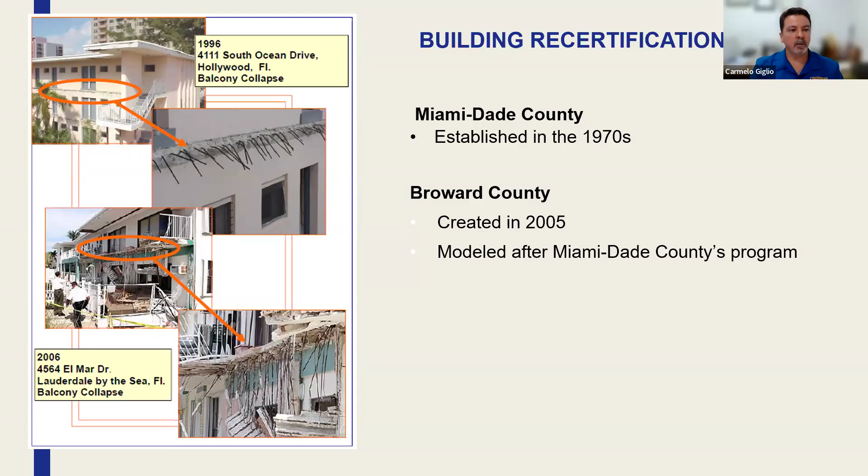So recertifications, when do they start? We had building failures, as we know too well now. But interestingly, Miami-Dade started their program back in the 1970s, the 40-year recert program, way back. It's been around for a long time. Then in 2005, Broward County started theirs. This photo is a clip from the Broward County program that's still out there. You can see the balcony collapsed, which is kind of when Broward County initiated their program.

I'm going to talk more about this. For the most part, we're going to discuss substantial structural deterioration. Just know that for the most part, when engineers go into buildings, they don't see this substantial structural deterioration, it's also a nebulous definition, but we don't see a lot of it. What we see is a lot of maintenance needed that doesn't rise to the level of substantial structural deterioration, but repairs are needed. Rarely does a phase 1 inspection pass outright. I think what's happening is a lot of engineers are passing these inspections despite repairs being needed, and I'll talk more about that in a bit.

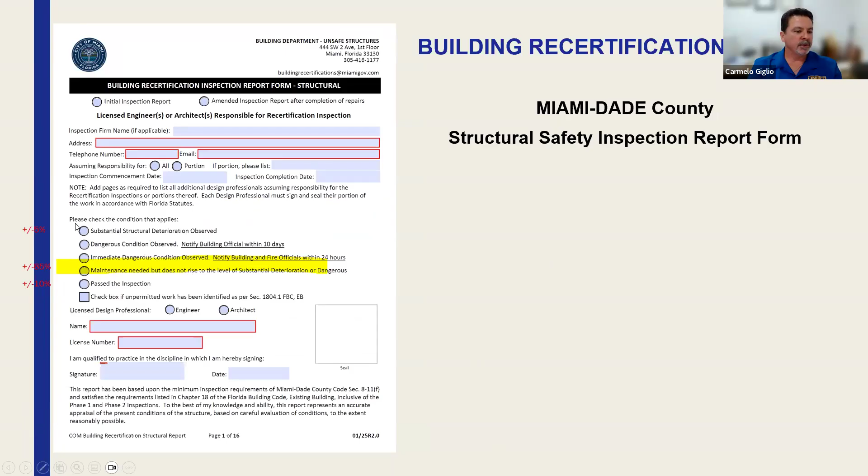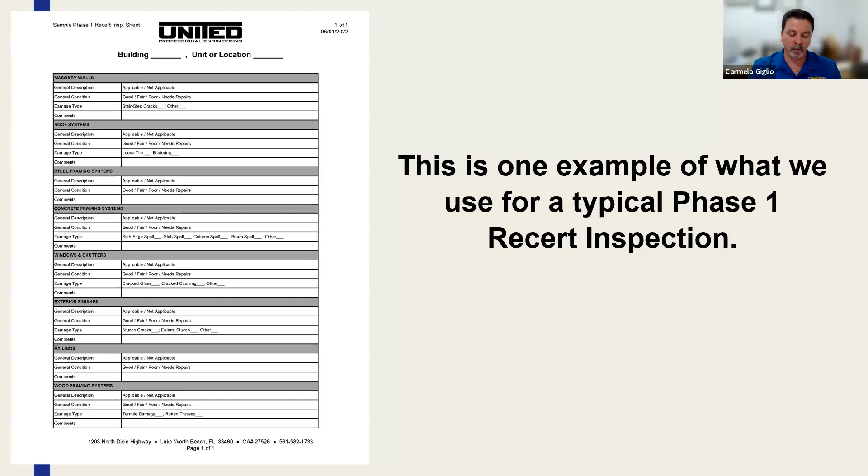This phase one is a cursory look at the building, not a full condition assessment. Engineers are looking at a sample, maybe 10, 20, or 30% of the balconies, perimeter areas, and common areas. They're also looking at typical, general areas only, not doing soundings or any testing. It's a visual assessment only, just a watered-down structural condition assessment.

Champlain Towers South occurred, as you know, interestingly enough, today's the 5-year anniversary. I was involved with the Surfside Working Group after the collapse. The Florida Engineering Society and the ACEC created the Surfside Working Group, and the purpose was to get together and come up with recommendations that the state could use statewide to make change for the better, to improve building safety in Florida.

So when we did the group, our intent was to not reinvent the wheel, but use what Miami-Dade County and Broward County were already doing, and extrapolate it out, maybe adding some things to make it more detailed.

One of the things brought up during the Surfside Working Group was the cycling. It was recommended that for coastal properties, the first milestone inspection be done at 20 years, then 7-year cycles, within 3 miles of the coast. Outside that 3 miles, you'd do a 30-year milestone and 10 years thereafter. That was in the paper, if you look it up.

The phasing was also a big one. The timing and cycling is very critical, but the phasing is critical too. There was never intended to be this language, 'substantial structural deterioration.' It was always supposed to be phase one, essentially a 40-year inspection - a milestone inspection - and then if you failed the phase one due to needed repairs, you'd go to phase two, a second part where you do a more thorough condition assessment.

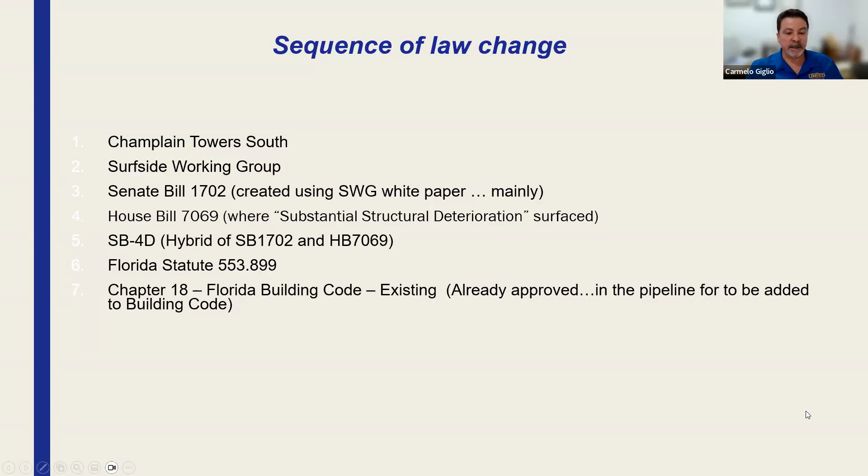Then the House came in and did their own bill, 7069, and that's where 'substantial structural deterioration' surfaced. In order for the House to accept the Senate's bill, a hybrid bill was created called SB 4D, and that's what was set to law. Florida Statute 553.899 was created from that, and then we got Chapter 18 - this statute went into the Florida Building Code, Chapter 18, which I need to check. As of a month ago it still wasn't in there, but it is in process.

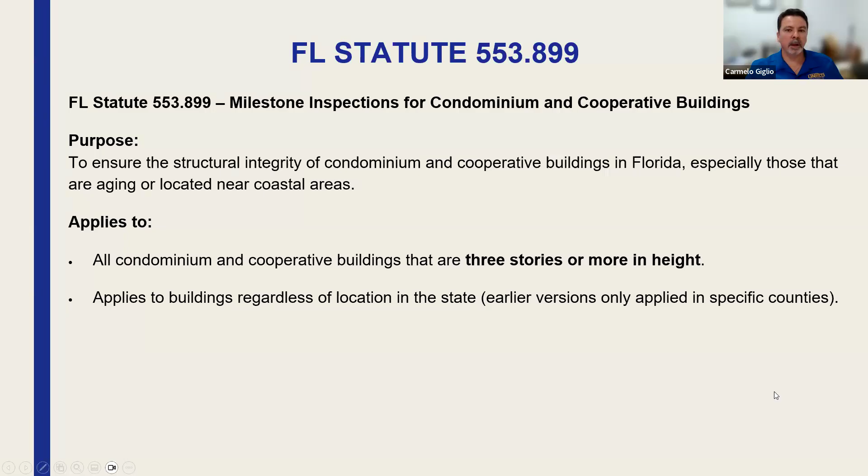This is kind of lengthy, as you know, but I'm not going to get too heavily into it - it can be read verbatim online. But it's mainly for multi-story condo buildings - that was the intent of 553899.

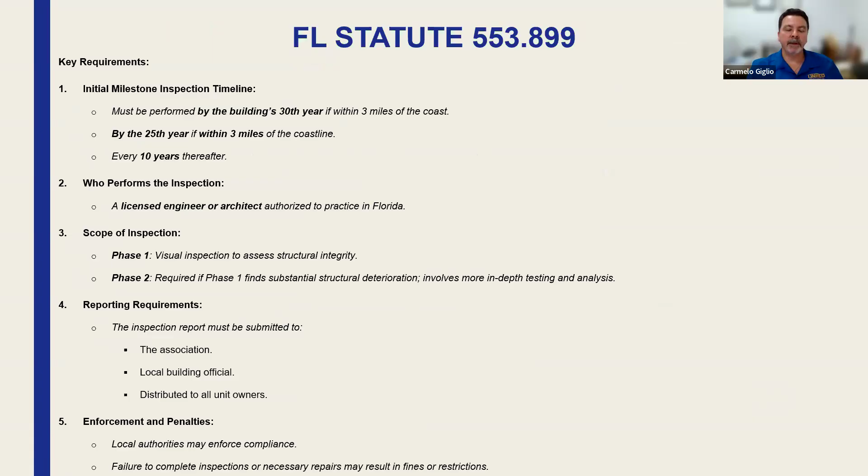We're going to talk a little bit about some of the counties - that statute's a minimum. Some counties have opted to have these inspections done on other types of buildings, including commercial buildings, which I'll talk about in a few minutes.

As an example of the cycling we talked about, Florida statute has 25 years for coastal properties and 30 years for inland, with cycles of 10 years after that - pretty much across the board. One interesting thing is Highland Beach kept a 25-year cycle and then 7 years thereafter, going with the tighter cycle recommended in the Surfside Working Group document. But the cycles are generally all the same.

In my opinion, in the end, I think we got a pretty good deal. We wanted 20 years and then 7 years thereafter; we got 25 and 10 years thereafter. The intent was redundancy in inspections, so that instead of one inspection at 40 years - before which we've had multiple collapses -

the intent is to do multiple inspections and repair cycles before reaching that 40-year-old threshold. That's for redundancy, to make sure you have multiple engineers, multiple owners, multiple contractors going through the building - more eyes, and a better possibility that a disaster can be mitigated. That was the intent behind the 20-year cycle, so you'd have had a 20, 27-year, 34, and so on - more cycles of repair.

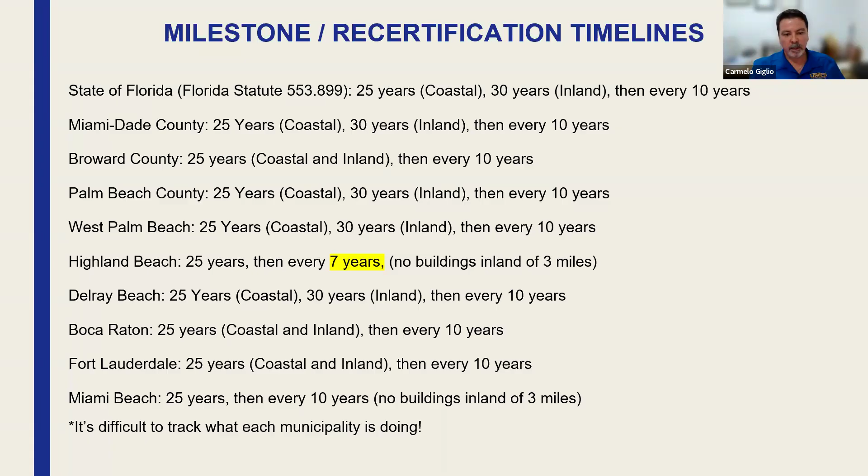But anyway, that's that - again, there's a problem with 'substantial structural deterioration.' And again, some of these slides are a little verbose, if you will, a lot of language.

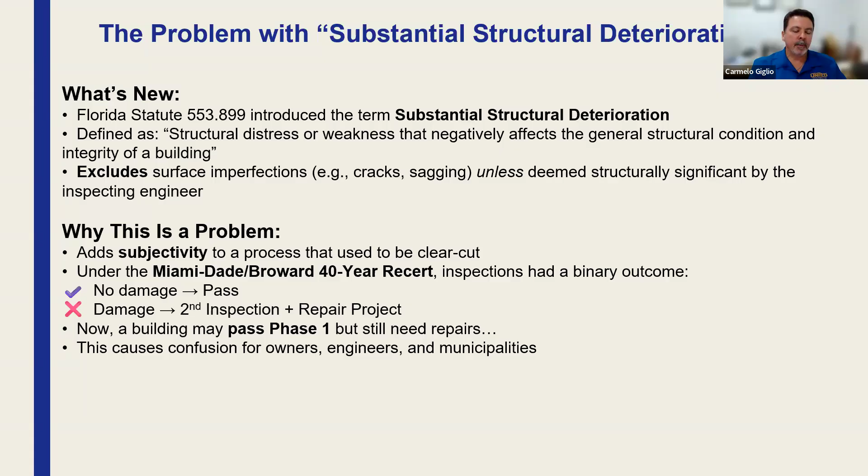What I was trying to convey is that I'd like these other slides a little better. This is what we used to have, the old 40-year inspection. You had a pass or a fail. If you failed, repairs were needed, then you do the repairs, and then you pass. If you don't need any repairs, you pass, and you're good for 10 years. That was very simple, and that was the intent of the Surfside Working Group.

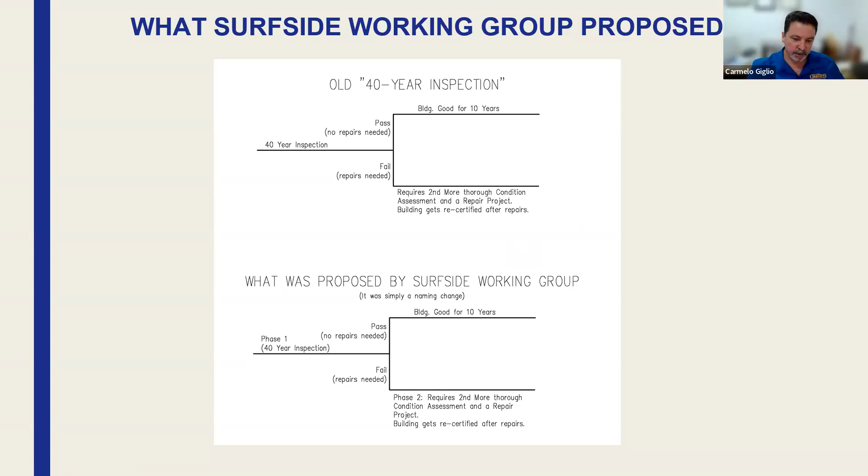It wasn't to change what was already being done. We just called it a phase one and a phase two. So if you do a phase one, which was a 40-year inspection, the two are synonymous. You pass it, you're good for 10 years. If you fail it, you go to a phase two, which is just a more thorough condition assessment. That's all that the Surfside Working Group recommended, okay?

What's happening though, what I'm seeing more and more of, is you're getting a pass when repairs are needed. So this is more of what we're seeing, I think, more commonly, which is a problem, because what you're having is a phase one is your milestone. The engineer passes the inspection, but repairs are needed, which causes complications down the road with who's enforcing it.

If you pass the inspection, who's enforcing it? We've had problems on multiple buildings where if we pass the inspection, but we tell them repairs are needed, nobody's enforcing it. Neither is the building department, by the way. We've had municipalities where we passed the phase one, and I actually reached out to the building official asking him, because the building went dark on us and basically refused to do repairs. I reached out to the building official asking, what is your procedure here? He went dark on me too, didn't respond.

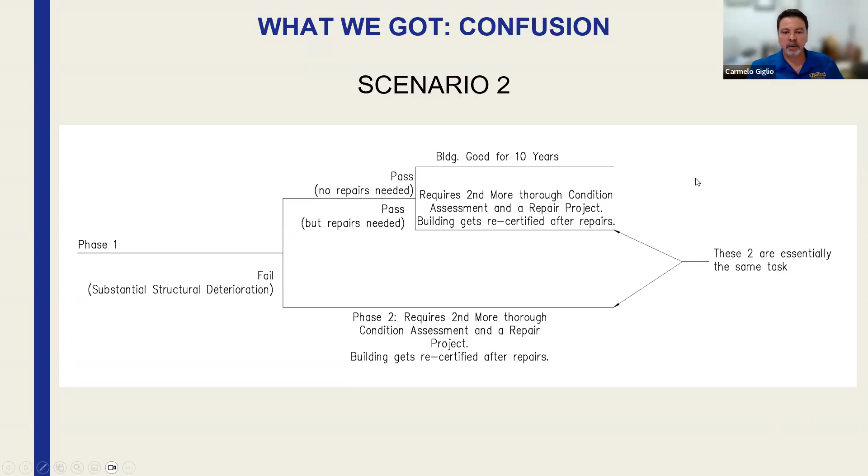So what we have is a bill, a law, that's making things more safe, but there's still a lot of confusion, and unfortunately change is needed because what we have now is this confusing substantial structural deterioration issue.

One of the things, I don't know if you're all aware of, there's a collapse on April 2nd this year in Hallandale Beach. I don't know the full details of it. This is an image from one of the newspapers. It looks to me like there was some kind of shear failure.

Over here were the beams that were coming across from the commercial building were also supported by the garage, and something failed on this side by the garage and the beams dropped. Fortunately, nobody was killed. Interestingly enough, I don't think there was a lot of publicity over this, which was really surprising.

This is really concerning to me because number one, Broward County does have commercial building recertification requirements, interestingly enough. Not everybody does, but this is a good example of why it should be done.

Another nugget from this that's concerning to me from the engineer's perspective is, what you can't really see, is most likely there's a stucco soffit on the bottom of these beams. Had they done a recertification inspection, remember it's non-destructive, so it's just a visual inspection. You walk on site, do you see problems? If you don't, you're good.

I could very easily see how an engineer could have walked onto this site and not seen any issues over here at the garage where your shear connections are at, because it was covered by the stucco soffit. So it's just a little nugget for myself and others to try to understand that this stuff is very complex. There's so much going on with these buildings, and things are covered up. We'll talk more about Surfside in a minute. But things are covered up and it's hard to see them.

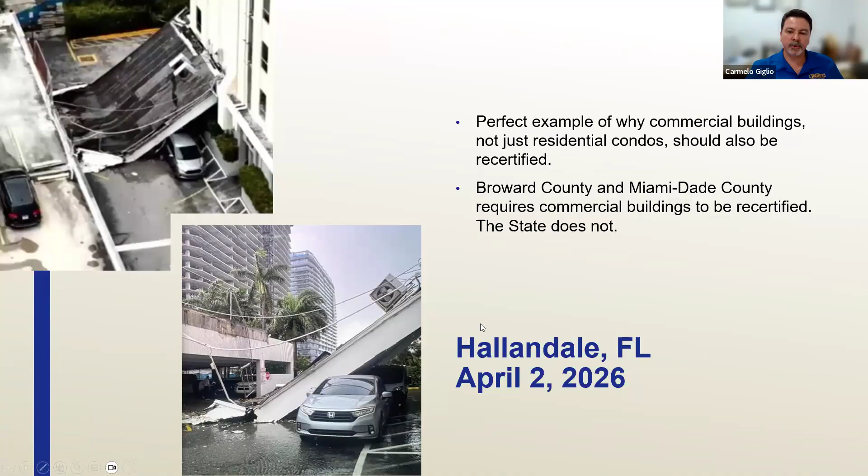I've got in those slides, I'm going to share more on why we've got to be diligent about not allowing repairs to happen, not allowing damage to happen.

NIST came out with their technical findings a couple of days ago. I can't remember if it was yesterday or the day before. These are screenshots from the video that they have on their website. This was the pool deck at Champlain Tower South. This right here was the south wall.

And then this is the building, the north tower that collapsed. This is kind of like a cross section through that slab. What happened is these two columns here gave out. There was punching shear failure here first, and then these dropped, and then this connection at the building ripped out and caused damage to the column and other problems. So again, this was the punching shear failure at the deck.

Now this is primarily what caused it. There was corrosion around the slab, probably from failed waterproofing over the years. Could have been overload too, definitely part of it. But remember, the building was in service. So there was a punching shear failure that then led to a domino effect.

If we go back to the other slide, that punching shear failure occurred over here on these two columns first, where there was the worst damage. Within the video, they talk about what was going on there. There was some additional loading, and there was under-design originally. So these two slabs gave out first, these parts here, and then these gave out subsequently.

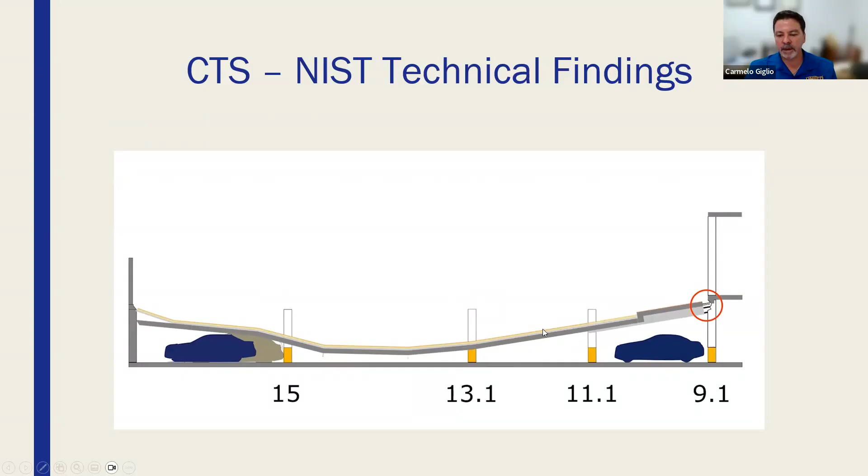But this is something that we as engineers need to look for. We've been on a job recently on a garage where there were a lot of cracks around the slab, and I told the association that we needed to do structural calcs for this, and they didn't like that, they didn't like to hear that. So we're still dealing with problems with people and boards not understanding how complex this stuff is, how difficult it is to understand where the damage is, how to quantify the damage, how to understand the extent of damage, and how safe is the current condition.

One thing that should be noted here - how would an engineer know if there was a problem? There was no way to see the top where all the cracks were at, because it was covered with pavers, sand, etc. It was a pool deck, so there was no way to see these cracks. What they did see, I think a few weeks prior to the collapse, was water coming down here. All that the engineers, perhaps management, owners would have seen is water coming down and maybe a severe crack around the perimeter of the column that would have been up here at this point prior to failure.

What also happened, subsequent to the failure, was that there was cracking - I should have taken a screenshot of that. There was a planter wall that moved, the slab dropped, and the planter wall, because masonry and concrete doesn't flex well, showed a lot of cracks with separation, that if somebody had a keen eye before the collapse, it may have flagged them to think there's a problem here, but nobody saw it probably.

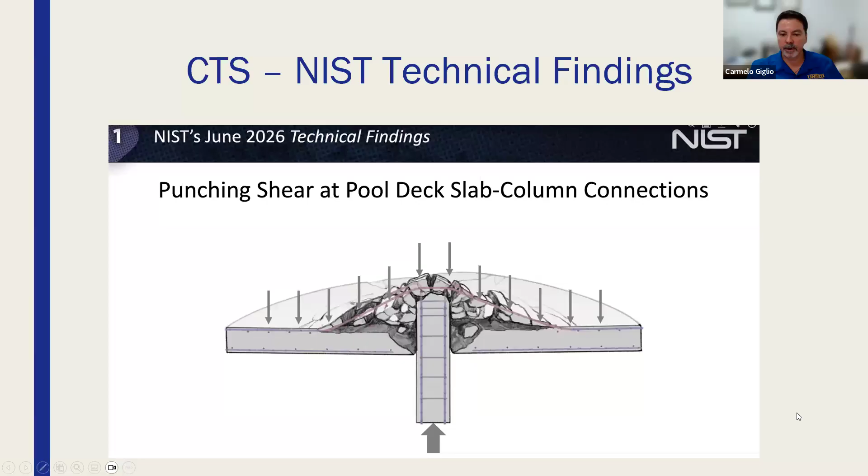Okay, so moving forward - what happened was the north end of that slab actually had a beam there. This is it here. When the slab collapsed, it yanked out, created a concrete void, and left an area of the column that was vulnerable. You can see here there was load testing done, and they replicated a failure where the reinforcing steel buckled.

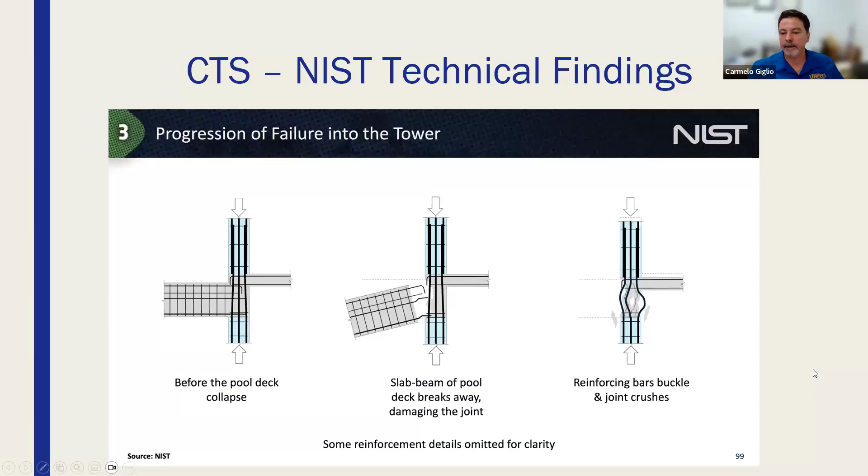This is kind of what happened, this is kind of why the progressive collapse happened. The pool deck collapsed, it yanked on the structure at the pool, which was the column and this beam here in the middle, and that weakening and material breakdown - because remember you still have the floors above pushing down - that weak link just dropped 16 inches, and then it just boom, initiated that progressive collapse. That's what happened to the collapse. Here's another image of it where this is the pool deck area that collapsed.

So the pool deck collapsed, and then it pulled on these two beams here, like I showed. This is the location right here, these two columns - these two yellow lines are beams. These beams pulled on the columns, and that's what created the collapse right there.

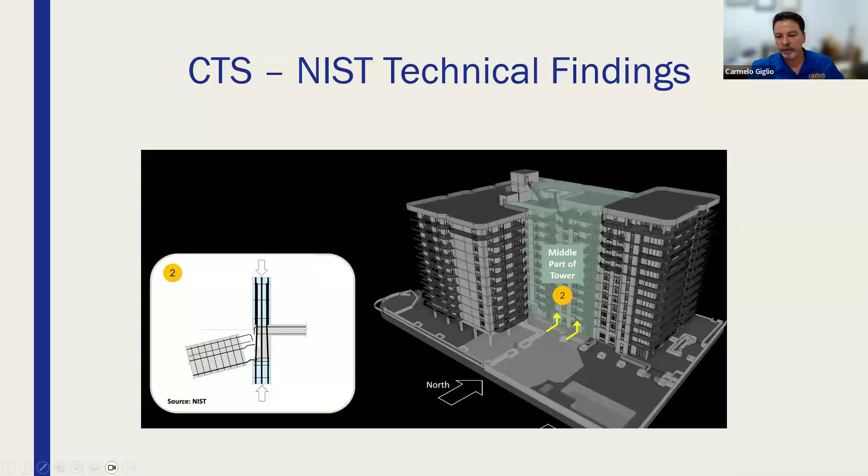Number one was the pool deck collapse, two is the middle part that collapsed, and three is the eastern part - I didn't get into this. Primarily I was more concerned about this because when we're doing structural inspections, we're looking to prevent a collapse. So I'm mostly interested in the pool deck collapse and what triggered that progressive collapse at part two. But that's what happened in simple terms.

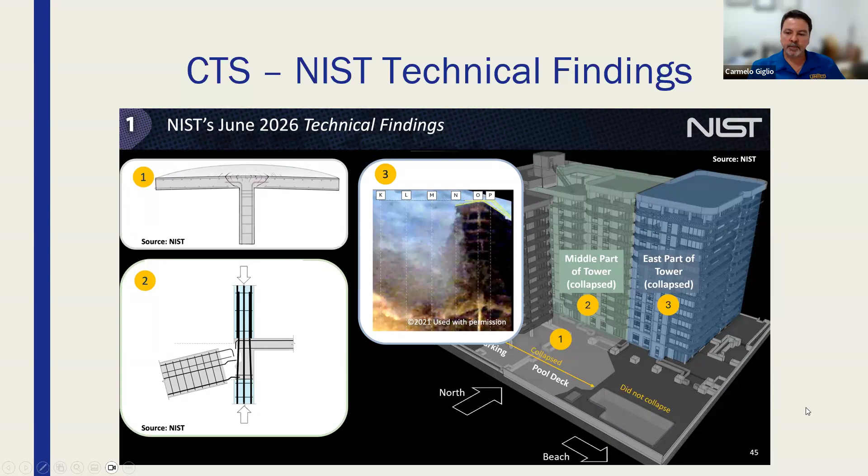NIST spent a lot of money. This right here, they recreated the beam-column interaction. You can see this diagram - they created a load test where they're pushing down to simulate the floors of the building pushing down in that area, and they also recreated the slab where they put in a lateral load, pulling that beam as the load is pushing down, and you can see how that would create a failure. It creates buckling, and there's a multitude of things happening, but that's the mechanism that caused the failure. You can see here too the beams and the columns, how they interact, and that's basically what they recreated.

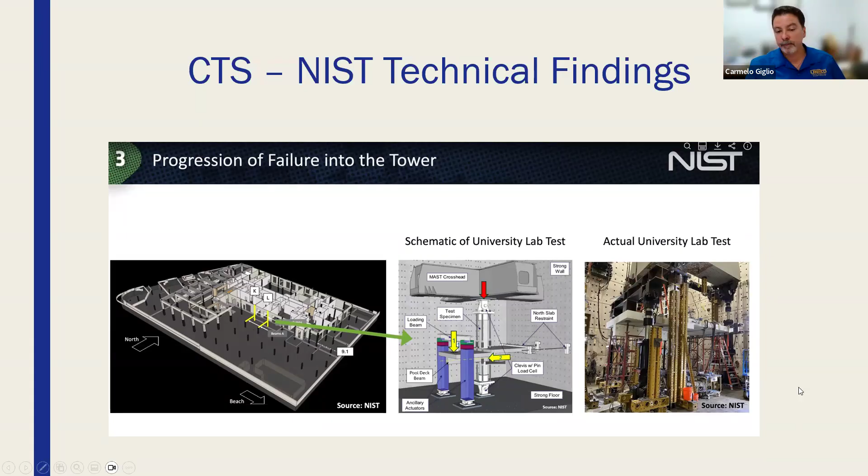So the test was really interesting, I thought. Here's another thing - they had hired a third-party engineer to look at the original design of the pool deck slab, and they found deficiencies in the original design. I think there were problems with the construction too - in other words, the construction wasn't built per the design, and so that was part of the problem as well.

Despite there being under-strength, deviations in as-built construction, and loads added to the structure - they had added the planters - they're saying there's no evidence of a specific initiating event, but it was most likely long-term degradation from corrosion that initiated the collapse. And that's all that we're talking about here with concrete repair. It's all about corrosion and the degradation of the concrete because of corrosion. That's all this is about.

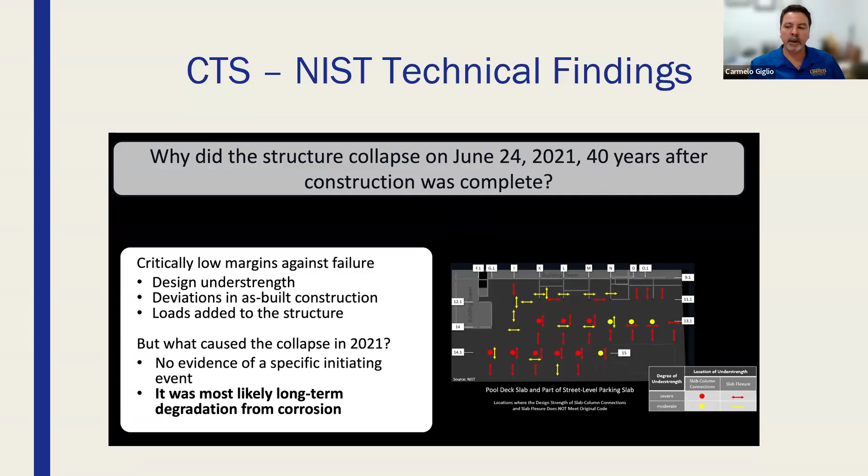And that's why - we'll get more into why we do what we do, and why this stuff's necessary, and why you can't let it go. You can't wait forever to do repair cycles, you've got to do them. And now we have a law that forces it, but it's a long time coming.

So some takeaways: building owners cannot lose control of the design. Even though CTS may have had some under-designs, it was in service for 40 years. Degradation from corrosion was a major contributor of the collapse per NIST. Cannot lose control of the design - that's what I try to tell people, it's so hard to wrap your head around this stuff. It's extremely complicated. I'm going to get more into who's most qualified to do these inspections because it's so complex.

You can't wait 20 years for repair cycles. Now we have a law that won't allow that, but believe me, I've seen it. I have an example I tell people whenever we're talking about Champlain Tower South. I went and gave a proposal to a building down in Surfside - it wasn't CTS, and I honestly can't recall, I tried to find the proposal, I can't find it. But when I went down to that site, I was a younger engineer. This was around 2006, 20 years ago, and at that time that building was 40 years old.

The board member I walked the site with told me the building official was about to condemn the building because they needed to do repairs. I walked the building with that guy, I had my hammer with me, sounded out some concrete, and the level of damage was extreme. I asked him when was the last time he did a repair cycle, a major repair - he told me never. So it was a 40-year-old building that never did one repair cycle per this director. That's unacceptable. But that's what we're talking about here.

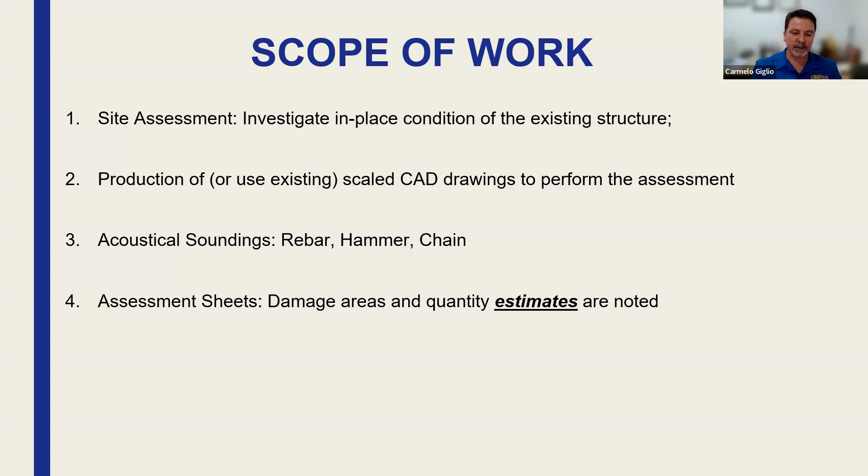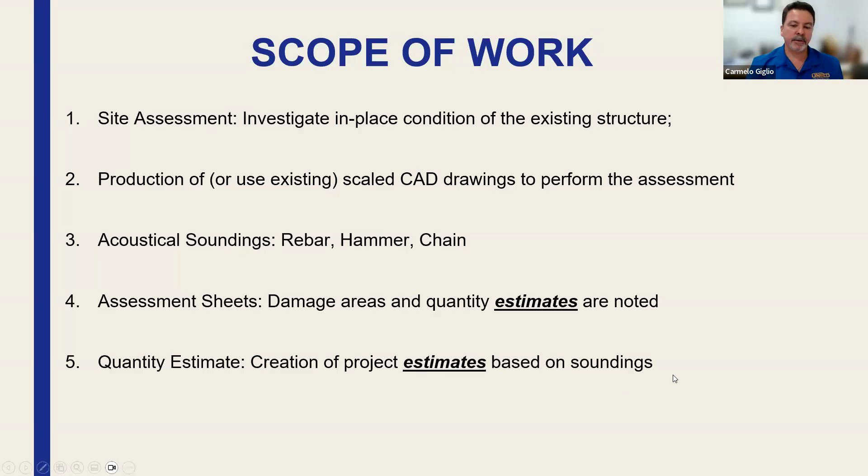Acoustical soundings, yes, can help identify problems, but it's mainly to quantify damage, and that's a big aspect. You've got the assessment itself, but you've also got the quantification survey that happens with it, so you can plan this project out. So it's important to understand why we're doing what. We use assessment sheets where we estimate the damage—I've got an example of that. The purpose is to come up with that quantity estimate using the acoustical soundings.

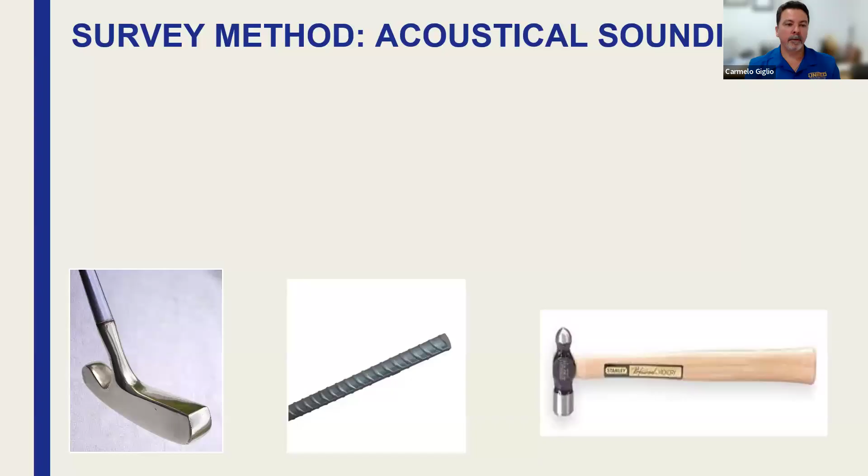So we have survey methods. The most common and cost-effective method of building survey is acoustical soundings. Believe it or not, it identifies the location of spalls, which are just chipped or fragmented pieces—the formal definition is flaked concrete pieces of stone or ore. The takeaway is a simple assessment technique is better for this work, and this is, again, to quantify the damage primarily.

Again, we want to identify - if we go back to Surfside, for instance, Champlain Tower South - had an engineer gone in there and walked that property 2-3 weeks prior to it collapsing, hopefully they would have seen the deflection in the slab in the garage. That's what I was trying to tell you earlier, that if there were no cracks at the columns, remember the cracks are on the tension side of the slab, which is on top. You might see cracking at the middle of the span where the droop is, but this is a visual inspection, looking around to see what's anomalous and does not look right. What did not look right there was there's major movement on that pool deck where the planter wall moved and there's a major crack in it.

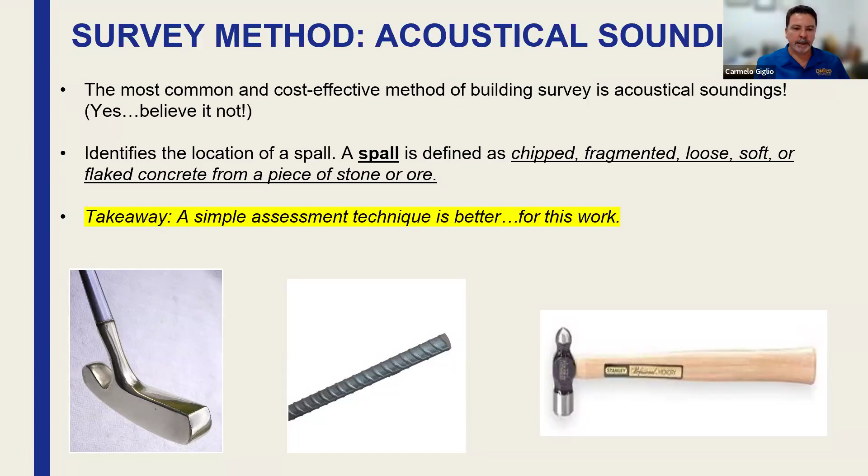There are other survey methods: GPR, impact echo, corrosion mapping, X-ray is one that came up not too long ago. We'll talk about tile on balconies - one of these buildings had tile on its balconies. I said, I can't see through tile, we need to take up the tile to investigate the concrete. Tangent nugget here: boards and unit owners don't want to hear that. They don't want their tile damaged. The tile becomes more important than the structure supporting the tile. That's another thing that doesn't make any sense in all this.

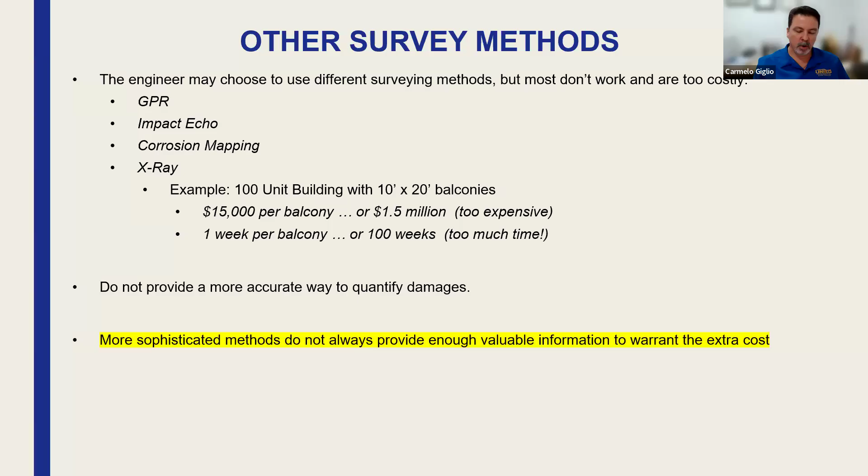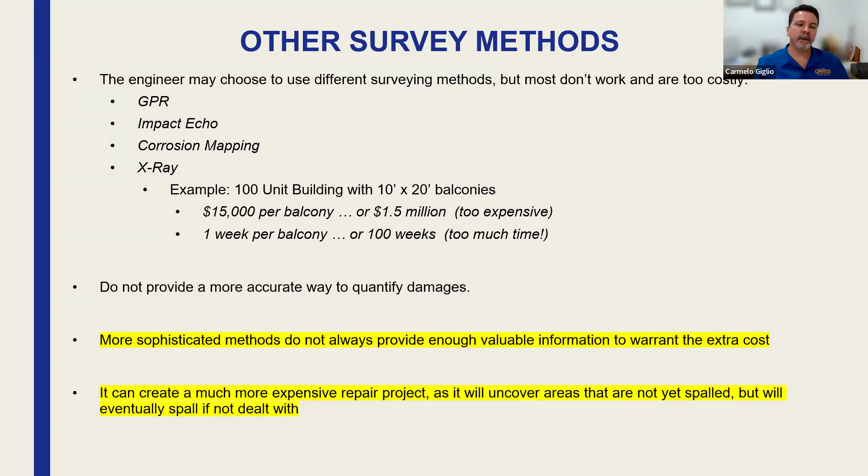X-rays are available, but look at this example: a 100-unit building, the balconies are about 10 by 20. The X-ray company wanted $15,000 per balcony, which would cost about $1.5 million. It would have taken 1 week per balcony to do the assessment, or 100 weeks total. So a takeaway here is that more sophisticated methods don't always provide enough valuable info for the extra cost, and it could create a much more expensive repair project. There are methods to do things, but sometimes they don't make any sense. In the end, you're better off - the simpler method ends up being simpler, but also cheaper in cost.

What this does too is allow you to monitor the building. So if you did it every 10 years, you can test the stability over time of the building. Let's say you did it for every repair cycle, you might obtain information that the building is weakening over time, and you've got to find the problems and why it's weakening—could be columns, could be shear walls, etc. So that is another type of test that we're doing.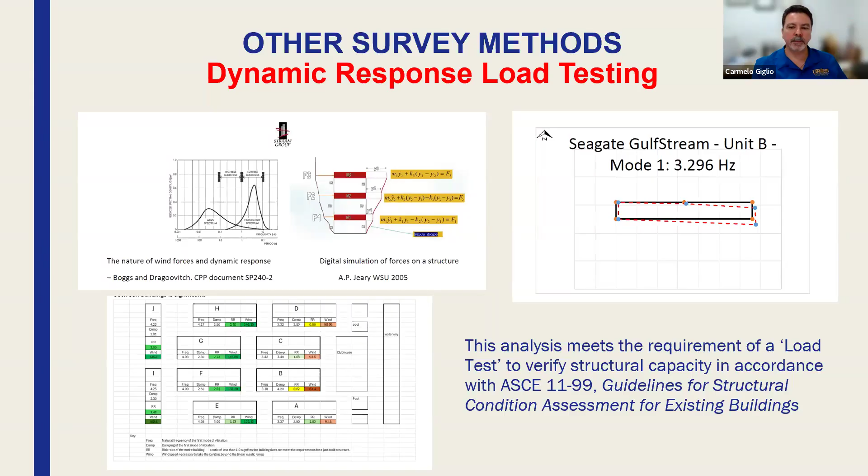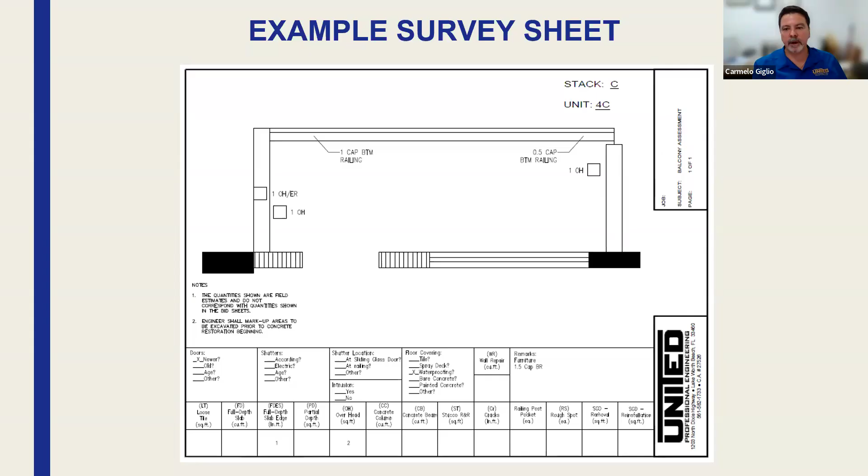Load testing—my opinion is that load testing is the best way to truly determine if damaged concrete should be repaired or not. There's a possibility: can a balcony slab carry the design live and dead loads in its current damaged state? So you may have spalling on, let's say, a balcony slab or a garage. This is an example, by the way, from a presentation by American Concrete Institute, I just took a screenshot. But clients would never pay for every balcony to be water tested or load tested like this. In some cases it wouldn't make any sense. There's a possibility we could do a percentage of balconies, but again it's too costly to do on every balcony that has a spall, for instance.

And so we take the approach of doing the repairs—we're going to discuss this a bit later on. Another important nugget: let's say there are repairs there, and we did do a load test, and the load test revealed that the current balcony slab can support the design live and dead loads currently. What's important to note is that corrosion is still occurring, so although it works today, it may not work a year from now. So in the end, what's the point of spending all the money on a load test to verify that it may work today if you're going to have to do repairs down the road?

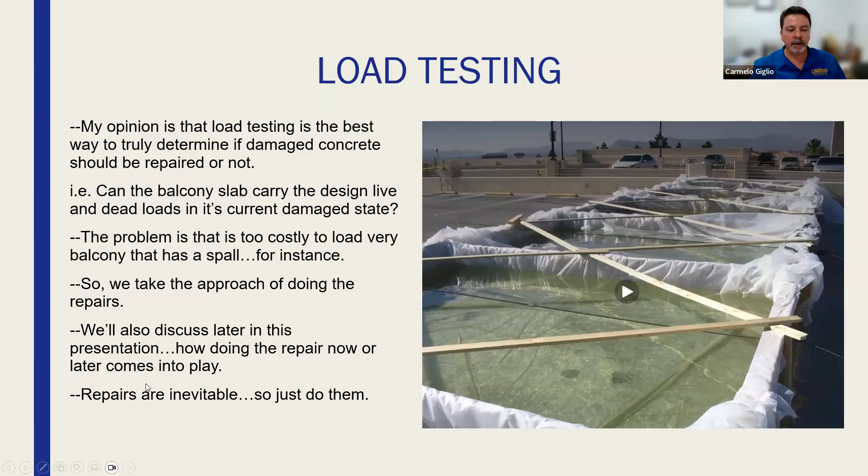This is just another look down the rabbit hole, saying, hey, even if we did do something such as a load test, does that even make any sense? If you've got inevitable concrete repairs happening, you still need to do repairs. So repair quantity estimation—it's very difficult, but it's important.

The strength and durability is what we're doing, right? So damage quantities are determined based on structural integrity and concrete longevity and durability. The why of it is: any concrete that is spalled must be removed and replaced. Again, this is an engineering mechanics topic beyond the scope of this presentation, but the load test discussion is a look at it from a deeper angle—even if that thing could support the load, shouldn't we repair it because it's going to continue to break down anyway? We estimate the actual volume of concrete that requires removal and replacement—that's basically what we're estimating, the scope of the project. And we often put ratios on whatever we estimate in the field.

And again, that's totally different for every engineer, this contingency number. For one engineer, maybe it's 1.5, for another, maybe it's 10. It all has to do with who's doing the assessment, what is their training, what's their approach to doing the assessment, how are they quantifying the damage when they're out in the field, what is their knowledge base, how much experience do they have actually doing concrete repair projects and understanding where damage is at during a project.

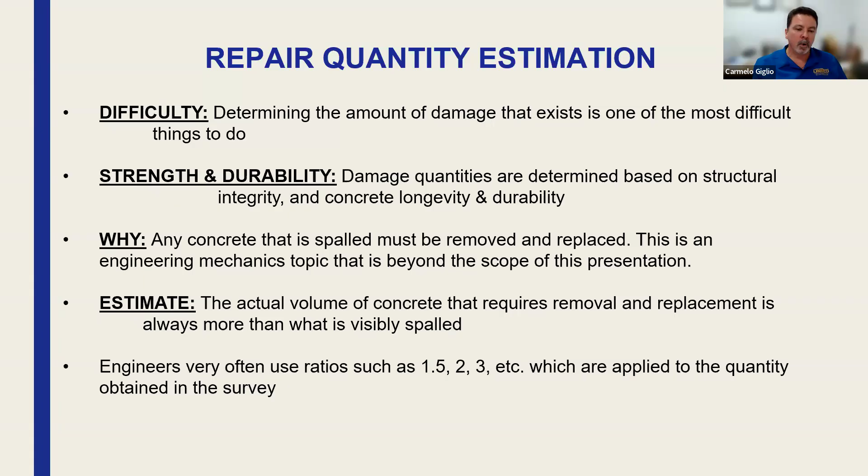Unit price versus lump sum. These projects are primarily unit price based. It's too risky for the engineer or the GC to go lump sum because the quantities are not known. It's just too risky. We've heard of a couple of cases, one in particular, where an engineer was actually sued. The project, they wanted to go lump sum - they meaning probably the board and the contractor - and the quantities went over the engineer's estimate, and then the engineer got sued.

But in the end, a successful project is one where everybody wins. I know Siobhan likes that, so that's maybe an inside joke.

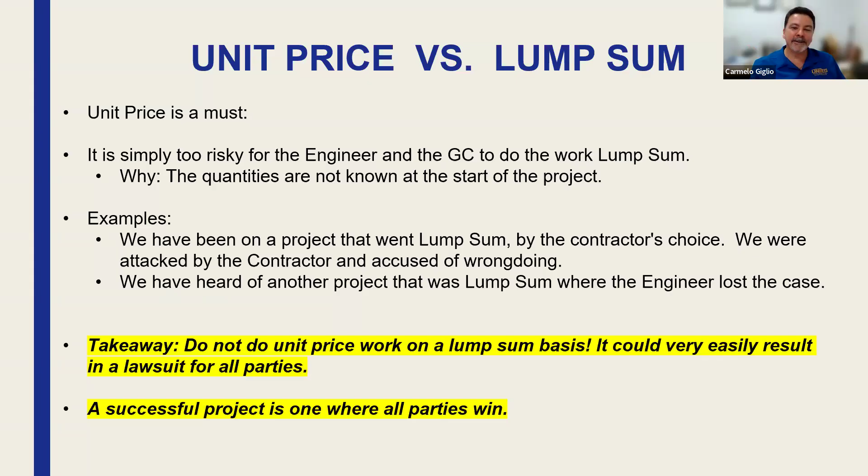Anyway, demand versus capacity. This kind of ties back to my load test example too. How many holes can be in a slab or column or beam before its capacity is less than its demand? Again, what if you had 100 holes in a slab, but it still can support the code demand, meaning the code live load.

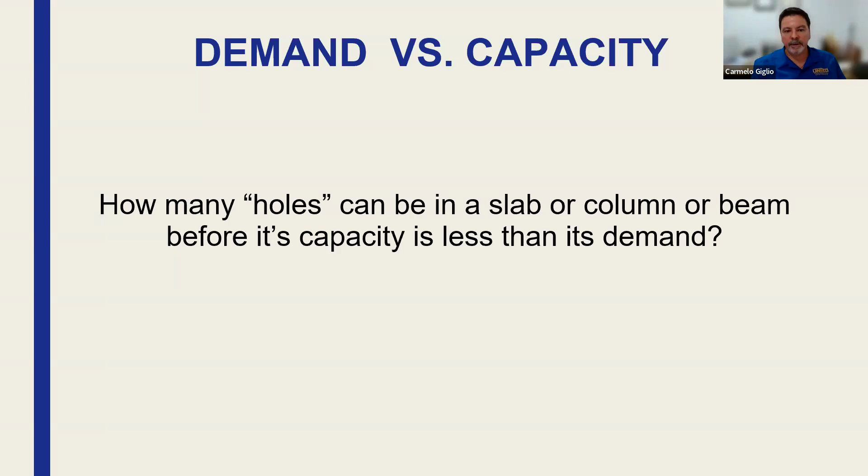Let's say it's 60 pounds per square foot for a balcony, and some kind of dead load superimposed like tile. But what we're doing is looking at that to do our repairs. So this is my cheesy engineering slide - it's the demand versus capacity discussion. So when we're speaking of repairs, we're talking demand versus capacity.

Per the ACI 562, which is the concrete repair code, capacity must be greater than or equal to demand. So demand is all dead loads plus FBC, the Florida Building Code live loads. The live loads are in the code, and then dead loads would be like the weight of the concrete, and then superimposed loads like tile, etc.

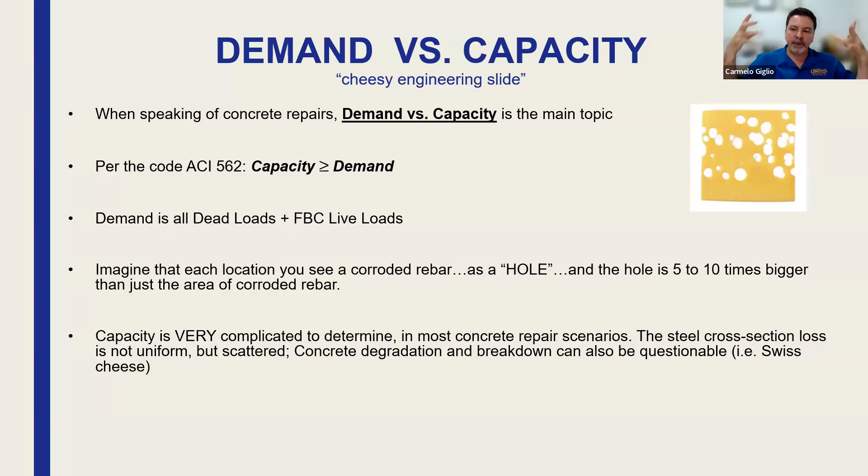But imagine that each time you see a corroded rebar or a spall as a hole in the slab, the hole is 5 to 10 times bigger than just the area of corroded bar. So what that means is like the tip of the iceberg analogy, where you see a corroded bar, but in reality the damage is much more than that. So each time you see a spalled area it's a hole, and you can only have so many holes until you have nothing left, right?

I mean, it's just common sense. So how many holes can you have before the capacity of the slab no longer meets the demand, or the capacity of the column no longer meets the demand, or what the applied load is. So...

I'm going to get more into this. The takeaway here is that the mechanics occurring in repairs is very complex, and therefore experience in structural design is the most important expertise your building engineer should have. It's something which architects or contractors have no training or expertise in typically.

This is important if you tie it back to the Surfside analysis, the NIST analysis that we went over earlier. Who did that? Who did that presentation? Those were not architects or contractors. Those are structural engineers. They weren't civil engineers, mechanical engineers, electrical engineers. They're structural, highly qualified, experienced, educated structural engineers.

And that's why I have this point here - it's so critical that we have structural engineers doing this work. That's why you primarily see engineers doing this work. That's why the Surfside Working Group recommended that the person doing phase two is a structural engineer with 10 plus years of experience doing structural design. There's a reason for it - you've got to have that trained eye to understand what's going on.

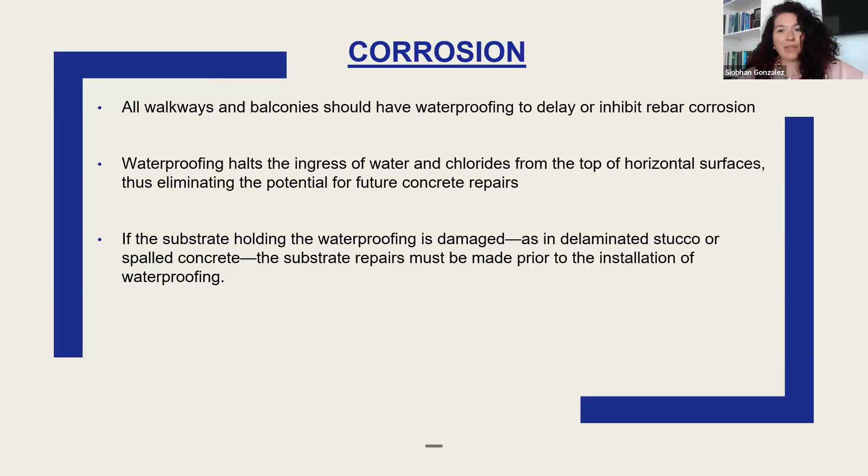It just doesn't make sense. Okay, Peggy, you have a question?

It's more of a comment. Over the past 5 years, especially since this collapse happened, in webinars in general I'm seeing that smaller communities don't have a building department staff that can accommodate the better judgment of a structural engineer. So I wanted to make a recommendation -- I don't know if you support this or not -- but if you don't have a structural engineer in the building department of your township or small city, at least go by the guidelines of Miami-Dade, because they're the ones who have set the guidelines pretty much for the industry.

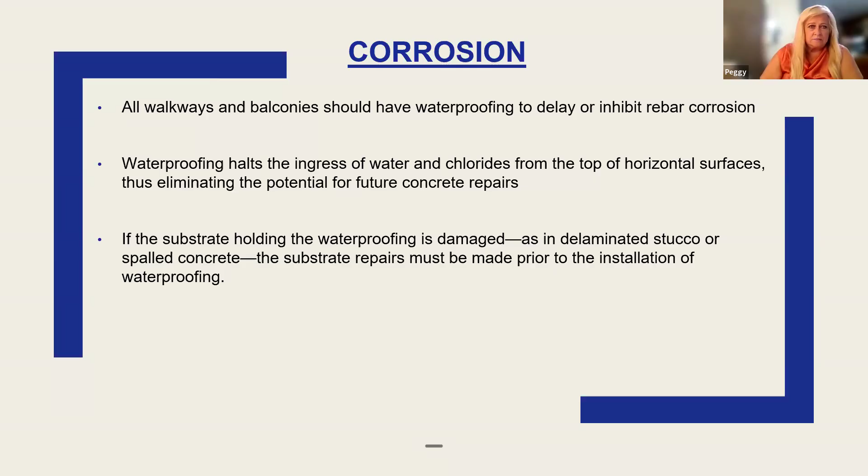Is that correct, Carmelo? Well, most municipalities don't have a licensed PE on staff, say a structural engineer. Some of them may be PEs, but some are maybe not trained enough. A lot of times they're building code people -- licensed building code officials or plan reviewers, etc. So it's different types of people, not engineers, not structural engineers. Some municipalities have SEs on staff, but not a lot. To answer your question, Peggy, really in Miami there's nothing to go by -- they have their boilerplate form that we need to complete, but it's the engineer doing the work who says whether it's safe or not.

Miami-Dade does have staff, and Broward has staff that potentially could help people. But I think a lot of the municipalities are up to speed now on the recert program, even smaller ones. I know Highland Beach, I know the building official there, he knows a lot. So I'm not sure how to answer that question other than that. Miami-Dade may or may not be - are you talking about Miami-Dade County? You're talking about different municipalities. There's a lot of municipalities down there, like smaller townships, et cetera.

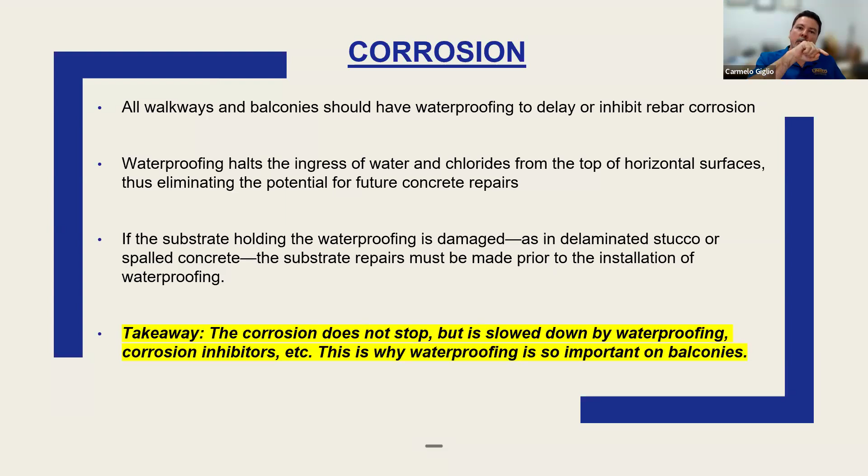Okay, so I think we talked about corrosion. I'm not sure if I mentioned this, but regarding corrosion, it doesn't stop, right? So this is important - when we use waterproofing, we can slow it down, but once the corrosion starts, it doesn't stop. Anecdotally, I've noticed that when the building is zero age, obviously it doesn't have anything yet, but then as breakdown and cracks occur, you start to get this corrosion cycle that happens, and you might see some minor repairs at, let's say, 15 years.

Sometimes on newer post-tension structures, you'll see a cable pop, a couple of cables. You might see some edge spalls - this relates not to 558 stuff where there were construction defects from the beginning, but I'm talking primarily about corrosion. So you might get edge spalls, not a lot, just a little bit, and then with time, what I've noticed is that when you get to that 30-year-old building mark, the corrosion moves exponentially, it seems.

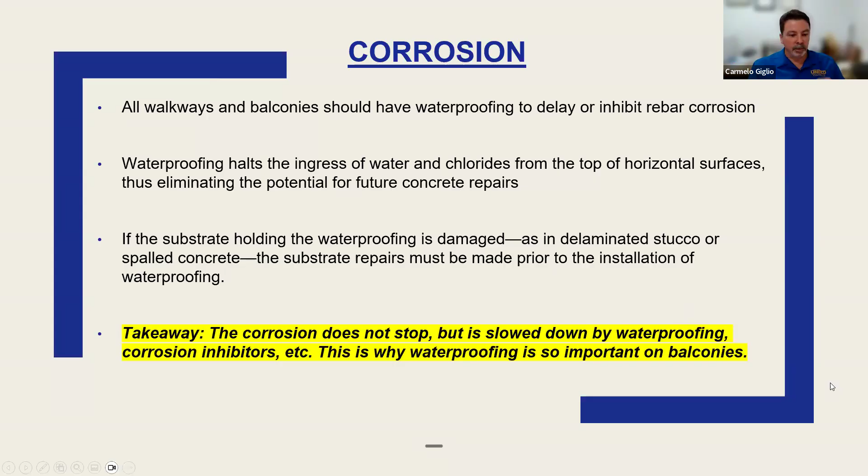So in other words, from 30 to 40 years of age, I think, again anecdotally, we've seen collapses in that window. I think what happens is you have significant corrosion between that 25 to 30-year mark and that 40-year mark, and if it's not mitigated, it obviously can be a problem, as we've seen. That's why we need more repair cycles to mitigate the process, to repair the concrete, restore its cross section, et cetera. Corrosion will happen inevitably if there's steel - it's an absolute guarantee.

When we're talking about repairs, this is an example where we design repairs hopefully that they last long. It's not just a structural conversation—will the repair last? It ties into my load test example earlier where the slab might work with some spalls on it for the demand, the capacity might still work, but at what point does it not work?

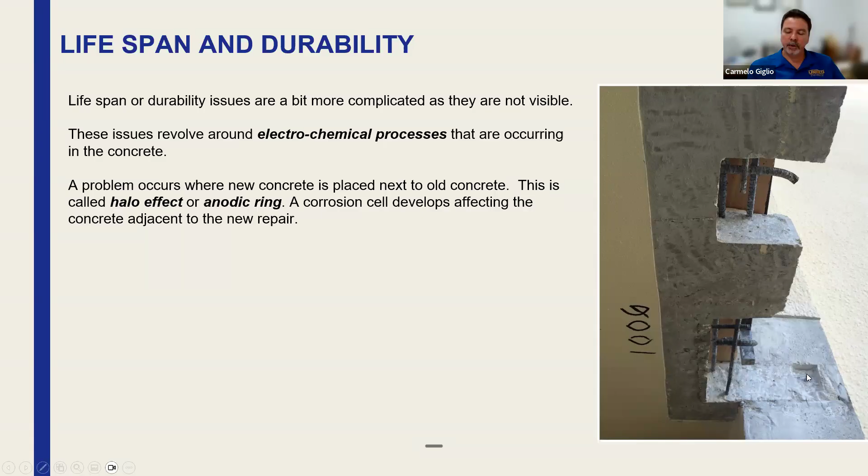But what you have is this electrochemical process corrosion, and you have a halo effect that occurs where the new and old concrete—the old concrete wants to spall faster once the new concrete is there. The electrochemical process cycle goes through the new to the old concrete. There's a pH differential as well. The new concrete coats the steel and it keeps the corrosion from occurring.

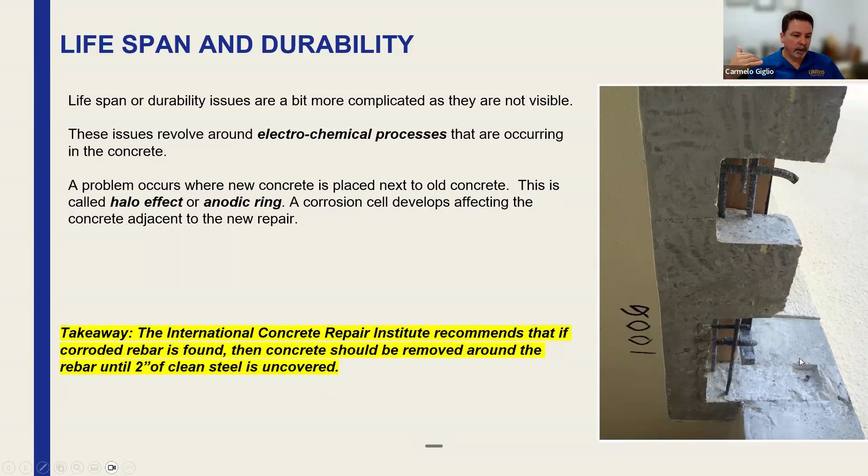So the ICRI recommends to some degree removing concrete until you have clean steel. Again, some of this is anecdotal and an engineer's decision on how far to extend concrete removal beyond the structural damage, beyond the spalled area.

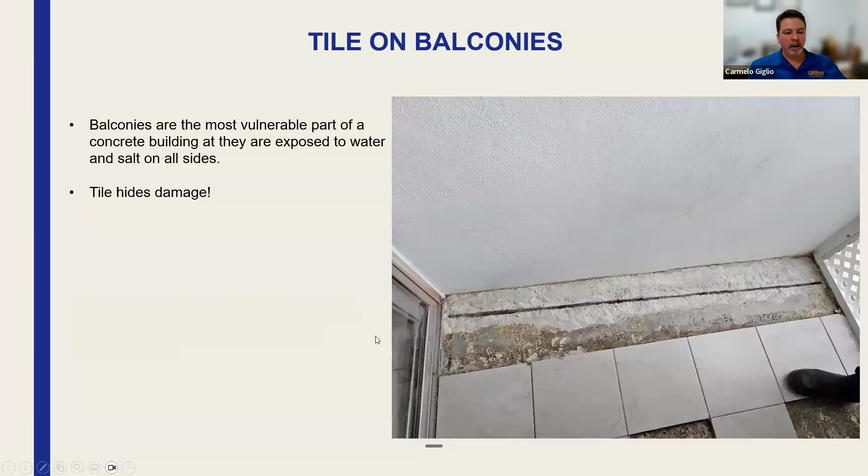This is an example of tile on balconies, how it can hide spalled concrete and rusted bars. This also comes up on every project when there's tile on the balconies. We recommend that tile be kept off of the balconies.

If damage is found, the engineers must provide specs for the repairs. This ties into my example where one municipality—we passed the phase one, even though repairs were needed, they needed a scope of work to do the repairs to get a permit with a licensed general contractor. You can't get a permit without structural construction documents, and you need an engineer for the structural construction documents.

So I don't know what this association did, how they did the repairs we told them they had to do. All repairs must be permitted. Most municipalities require a permit for work exceeding $2,500.

Palm Beach County—we called them on one little job. They said that they required a permit on any project of any size if it was commercial. So these multi-story residential buildings were in there.

Maintenance staff should not be doing repairs on structural components, especially threshold buildings.

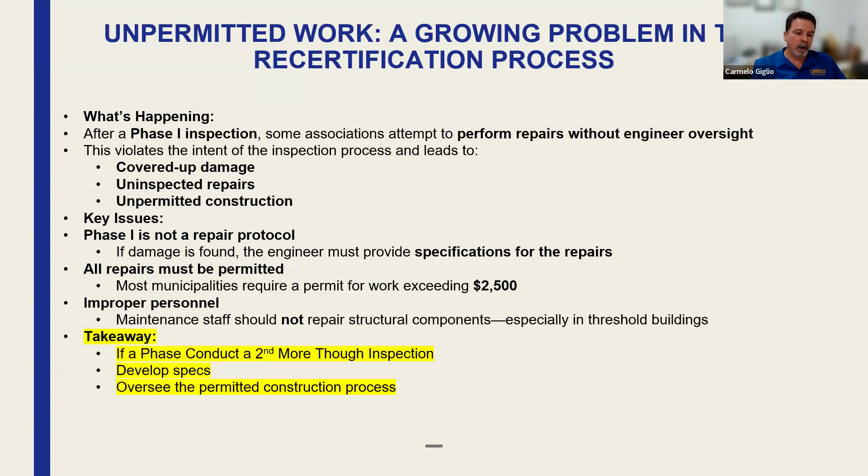But if you've got repairs, you need a permit. In order to get a permit, you need structural design. Also, this stuff is structural, so they shouldn't be doing any work without an engineer's oversight. I could go on and on with this stuff—some of it just simply doesn't make any sense.

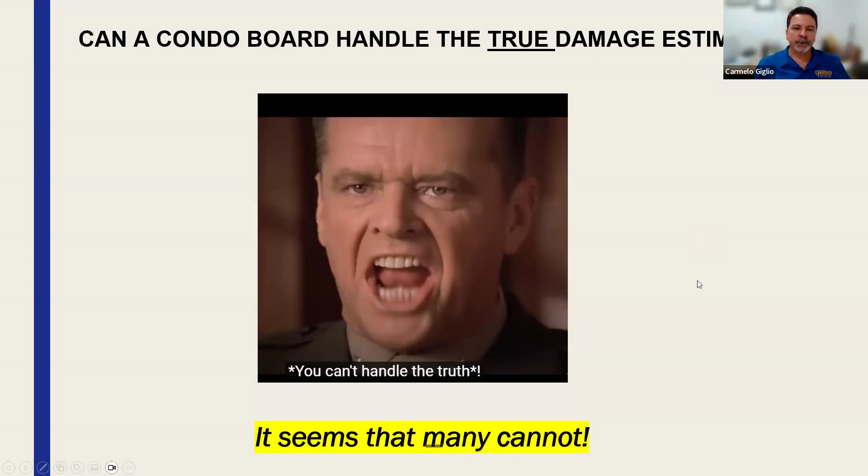I was sliding through to see if I could find a slide, because there's a lot more information during part 4, which is the longest phase of the project, during construction. It's hard for us to hit all that. We spend a lot of time on the front end because that's kind of where it's not understood, and there's so much of what we do that's not understood. We were talking before about expanding the class because what we need to do is break it up and do an hour segment for each section since there's so much information to share.

I think a big takeaway would be: if you see something, fix it. Going back to Surfside, had somebody seen the movement in the slab, that could have potentially done something. Maybe not, but the trick is, when I watch that video, how do we ensure that we're walking a building and doing the best we can to make sure there's no damage.

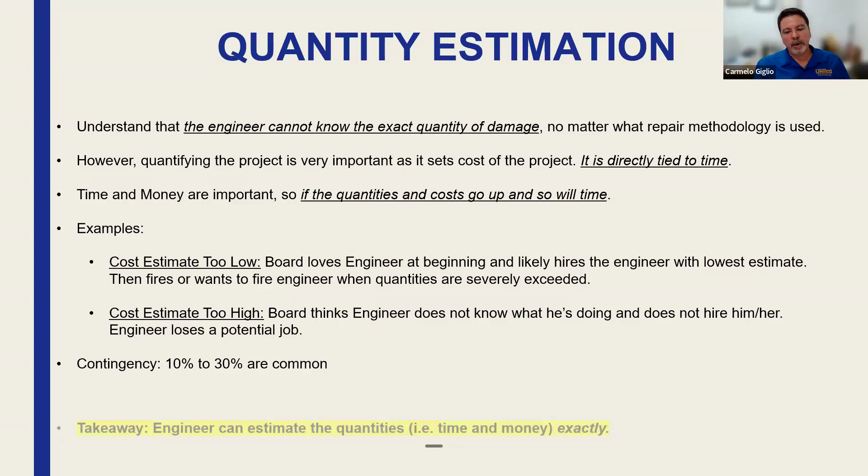So if you see something, do the work. For the phase ones, whether you fail or pass a phase one, if you've got to do work, do the work. Remember, you need a building permit. So whoever's saying you don't need one, that's not true. Those are some takeaways, Siobhan. I could go on and on about it, there's so much stuff we can talk about.

This is a slide on special inspections and CA, et cetera. We had construction admin versus construction management. The contractor is responsible for means, methods, techniques, sequences, and procedures. There's so much that we can talk about.

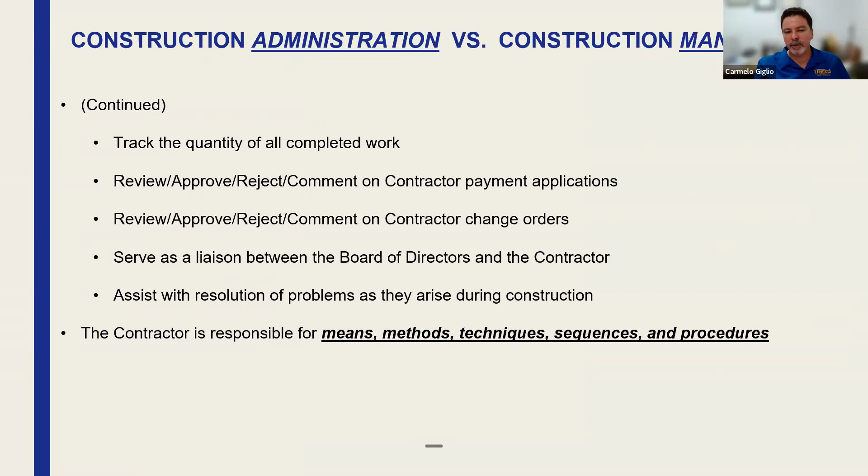Perhaps, Peggy, we need to do a part 2. I will bring you back. This was a really good talk, great information about CA, the part 4 of the project, which is the construction aspect.

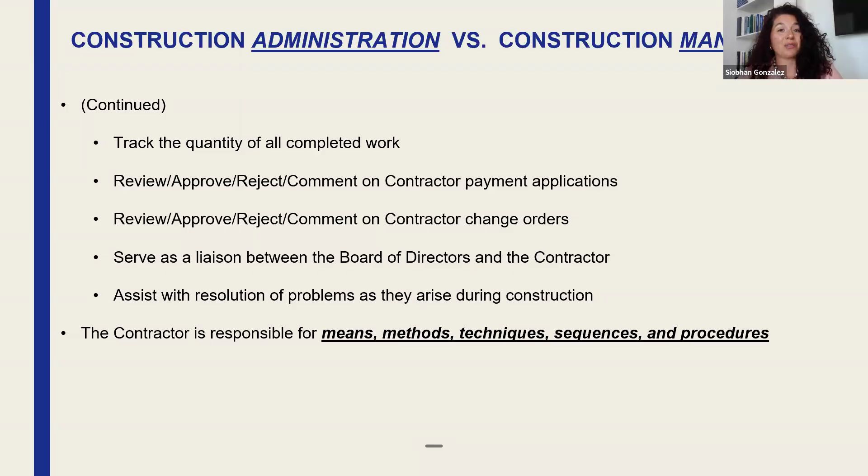I think too, one item that's very valuable, that we just did a newsletter on, is the timelines. That's a good point. We got questions about it, like Miami Beach municipality saying 'I don't have to get my milestone for 30 years.'

If they have capital projects coming up, or know they're going into a larger project, I'd like for you to share that timeline, because we talk to plenty of boards and managers, and sometimes they wait last minute or they just don't know. Then they realize, 'we have an issue, I need to take care of this,' and they reach out, and it's like, okay, yes, we can help. The reality is we're 6 months out to boots on the ground, if everyone does exactly what they're supposed to do on time.

But there's a lot of steps: from hiring the engineer, then the engineer has to do the physical field assessment, that's about a month. Then you've got to take that data back, do our bid estimate, get our quantities assembled, and get the assessment sheets. We get them to the board and the manager and have them review the scope of work we plan and the quantities in our project estimate.

That usually is a big discussion, it could go on for a month with them going back and forth: well, what's the scope of work, why do we need to do this work, etc. But assuming that all goes well, part one is the assessment, and then part two we have the project manual, that's another month or so. So you're talking at least 2 months between part one and part two.

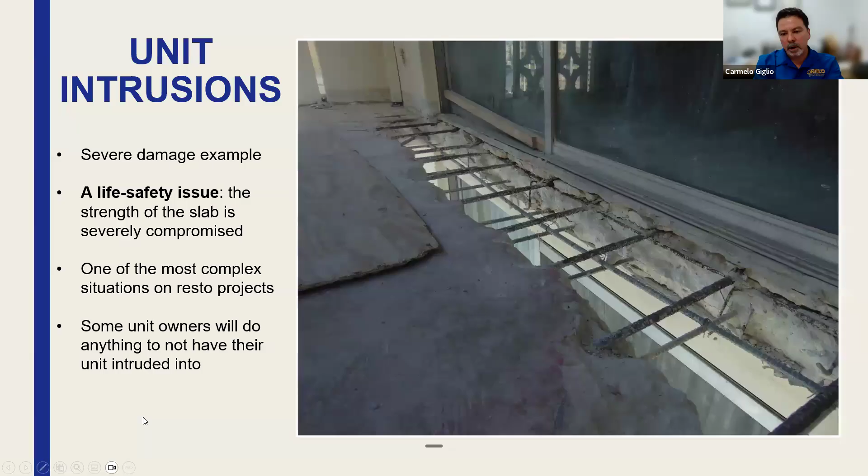Well, I think that it's 2:02, so I know that Peggy typically has a hard stop.